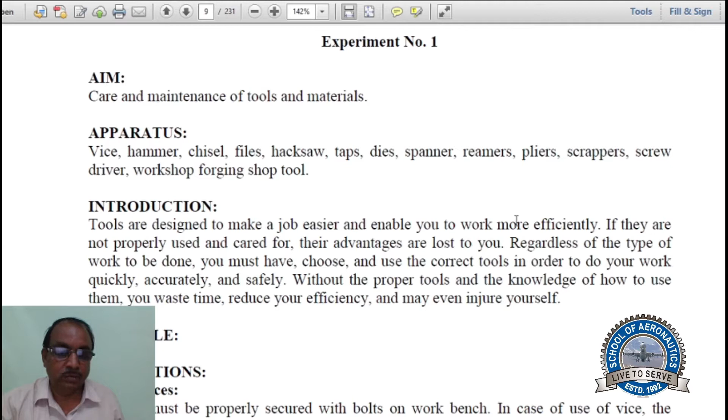Principle: precautions. Care of vices. Vice must be properly secured with bolts on workbench. In case of use of vice, the bolt must be checked and, if found loose, should be tightened with wrench or spanner. Vice should be cleaned with cotton before and after use. After 6 months of use, the main screw should be dismantled and lubricated properly.

The handle of vice should be such that while using it, it should not come out. Care should be taken that it does not bend by hammering it forcefully. Securing of workpiece between jaw and vice: workpiece must be secured in the center of vice between the jaws.

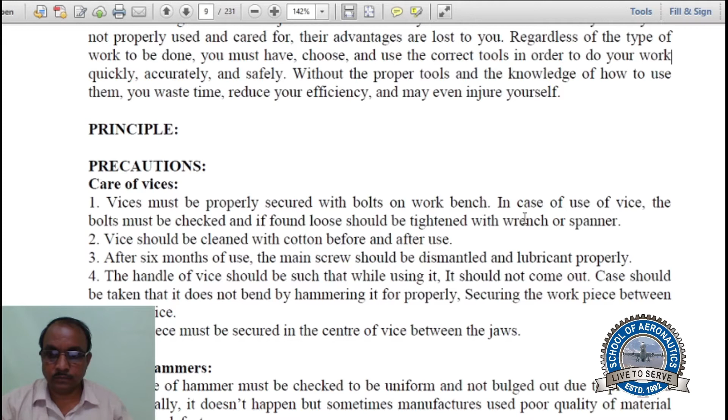Care of hammers. The face of hammer must be checked to be uniform and not bulged out due to prolonged use. Normally, it does not happen, but sometimes manufacturers use poor quality material causing this defect. The hammer should be properly cleaned and wiped out by cotton before and after use.

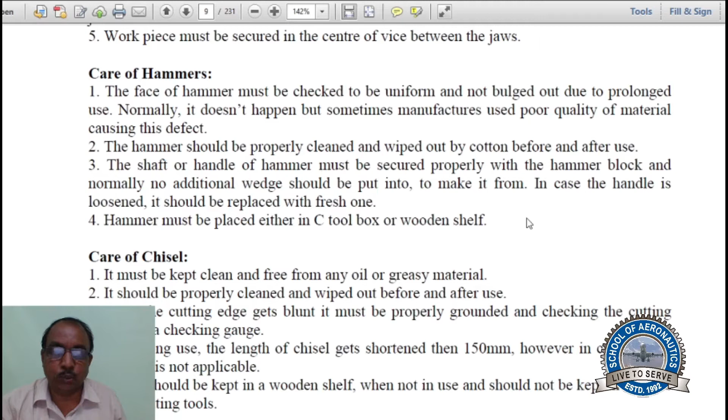The shaft or handle of hammer must be secured properly with the hammer block, and normally no additional wedge should be put into it to make it firm. In case the handle is loosened, it should be replaced with a fresh one. Hammer must be placed either in a toolbox or wooden shelf.

Care of chisel. It must be kept clean and free from any oil or greasy material. It should be properly cleaned and wiped out before and after use. Once the cutting edge gets blunt, it must be properly ground, checking the cutting edge with a checking gauge.

After long use, the length of chisel gets shorter than 150 mm. However, in case of fine chisel, this is not applicable. Chisel should be kept in a wooden shelf when not in use and should not be kept in a bundle or with cutting tools.

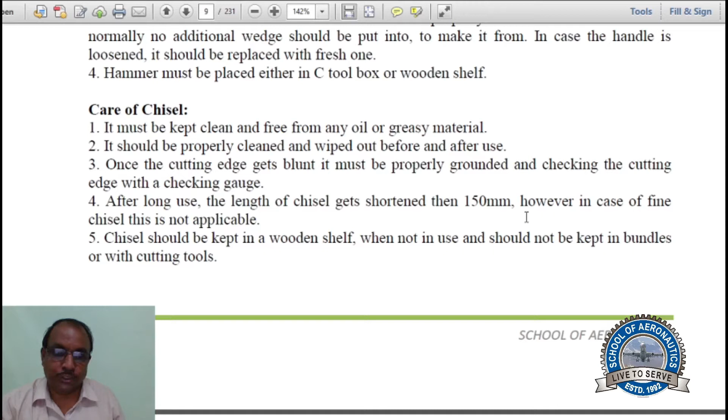Care of files. The file should not be used without handle or with a loose fitting handle. A file should never be used on hardened steel, hard surface scale, or allowed to strike against the hardened vice jaw. The new file should be used first on copper, brass, and then on wrought iron and mild steel.

Files should be cleaned with a thin hard wire brush or file card. After cleaning the file, chalk should be rubbed into the file teeth to prevent clogging of pins. The file should not be allowed to rust; to prevent it, the file is coated with machine oil.

The oil should be removed before the file is put to use by carbon tetrachloride or caustic soda. The worn out file may be reused by dipping it in hydrochloric acid. Worn out files are best suited for making scrapers, punches, chisels, etc.

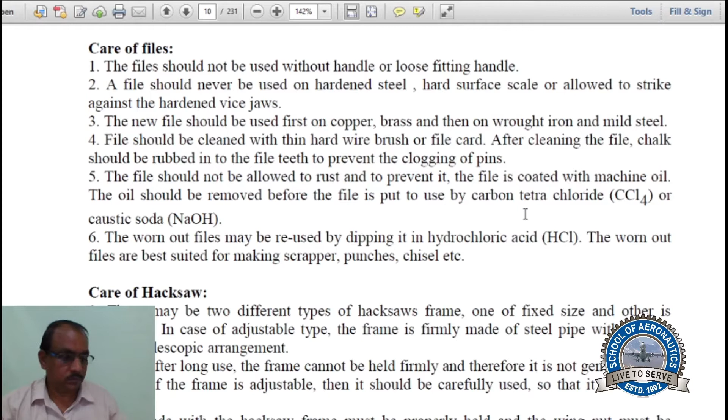Care of hacksaw. There may be two different types of hacksaw frame, one of fixed size and the other adjustable. In case of adjustable type, the frame is made of a steel pipe with locating holes of telescopic arrangement. In this, after long use, the frame cannot be held firmly and therefore it is not generally used. However, if the frame is adjustable, it should be carefully used so that it does not get loosened.

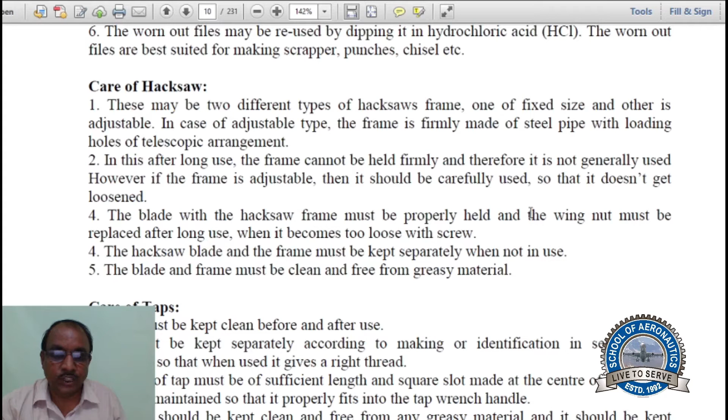The blade with the hacksaw frame must be properly held and the wing nut must be replaced after long use when it becomes too loose with the screw. The hacksaw blade and the frame must be kept separately when not in use. The blade and frame must be clean and free from greasy material.

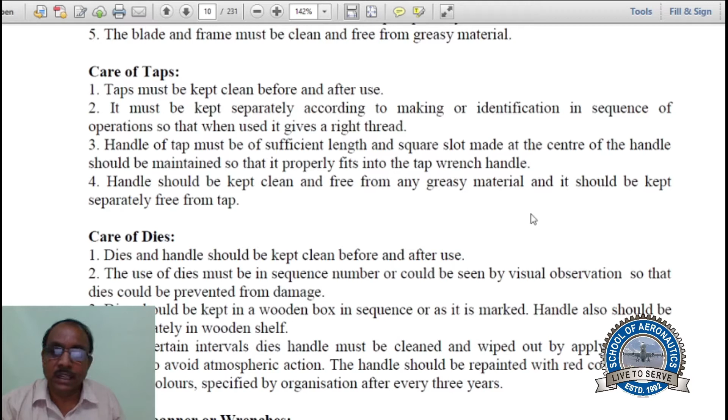Care of taps. Taps must be kept clean before and after use. They must be kept separately according to marking or identification in sequence of operation so that when used they give a right thread. Handle of tap must be of sufficient length and a square slot made at the center of the handle should be maintained so that it properly fits into the tap wrench handle. Handle should be kept clean and free from any greasy material and it should be kept separately from the tap.

Care of dies. Dies and handle should be kept clean before and after use. The use of dies must be in sequence number or could be seen by visual observation so that dies could be prevented from damage. Die should be kept in a wooden box in sequence or as it is marked. Handle also should be kept separately in wooden shelf.

After certain intervals, the handle must be cleaned and wiped by applying some lubricant to avoid atmospheric action. The handle should be repainted with red color or any specific color specified by the organization after every 3 years.

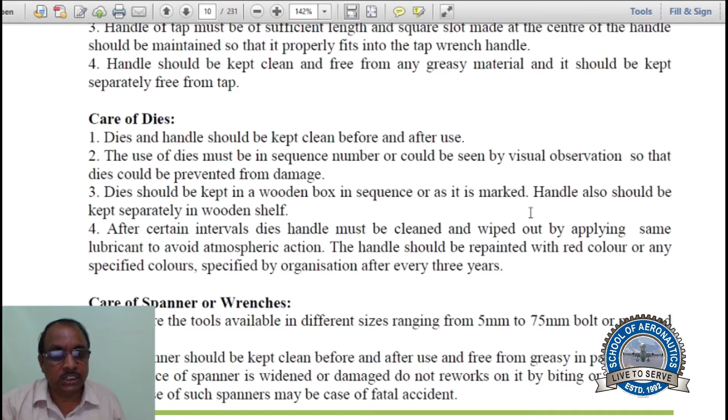Care of spanners or wrenches. These are tools available in different sizes ranging from 5 mm to 75 mm bolt or nut head size. The spanner should be kept clean before and after use and free from grease in particular. If the face of a spanner is widened or damaged, do not rework on it by beating or making it correct. Use of such a spanner may be the cause of a fatal accident.

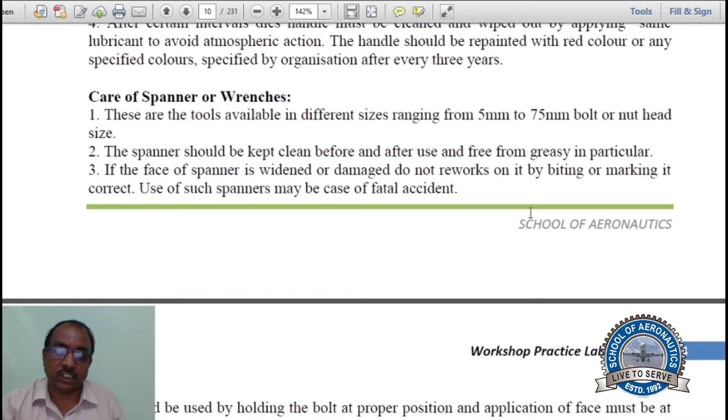It should be used by holding the bolt at proper position and application. A face must be at the extreme end of a spanner or wrench and it should be turned at right angle to the length of the bolt. Always use the right size of a spanner to avoid any damage to bolt head or screw. The spanner must be kept in a cloth jacket with flaps.

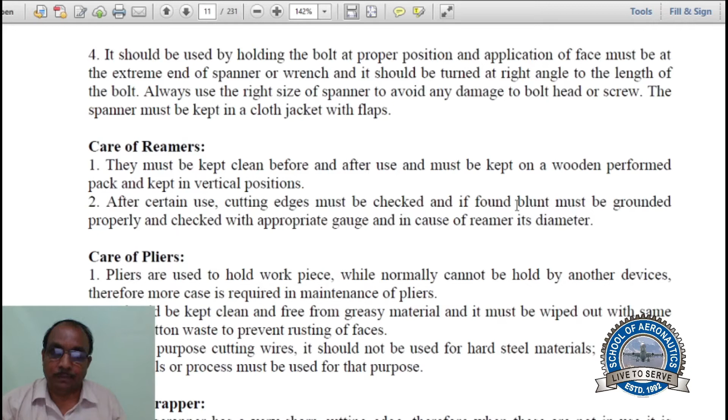Care of reamers. They must be kept clean before and after use and must be kept on a wooden performed pack and kept in vertical positions. After certain use, cutting edge must be checked and if found blunt, must be grounded properly and checked with appropriate gauge, and in case of reamer, its diameter.

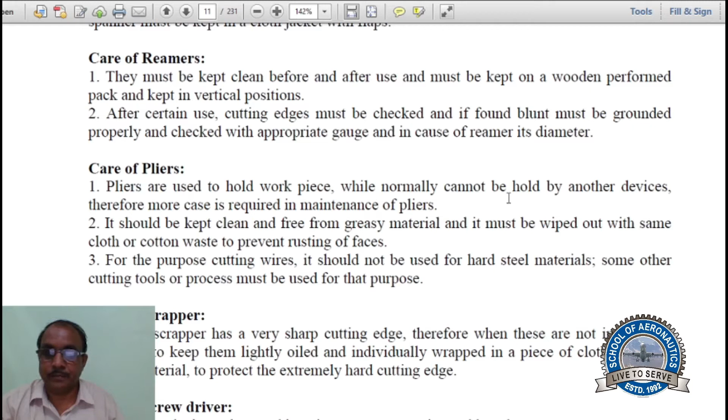Care of pliers. Pliers are used to hold workpiece while normally cannot be held by another devices. Therefore, more care is required in maintenance of pliers. It should be kept clean and free from greasy material and it must be wiped out with same cloth or cotton waste to prevent rusting of faces. For the purpose of cutting wire, it should not be used for hard steel material. Some other cutting tools or process must be used for that purpose.

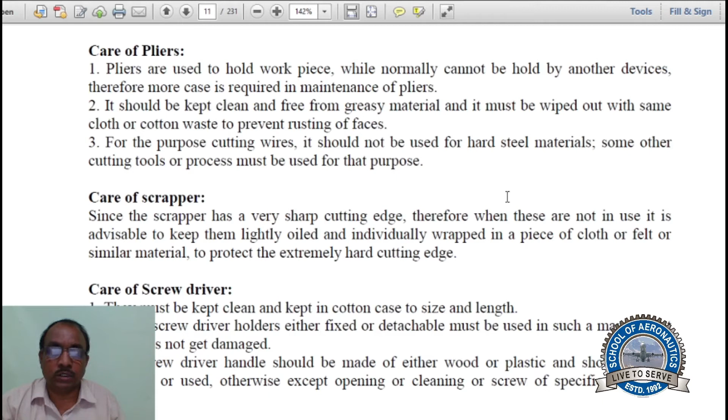Care of a scraper. Since the scraper has a very sharp cutting edge, therefore, when these are not in use, it is advisable to keep them lightly oiled and individually wrapped in a piece of cloth or felt or similar material to protect the extremely hard cutting edge.

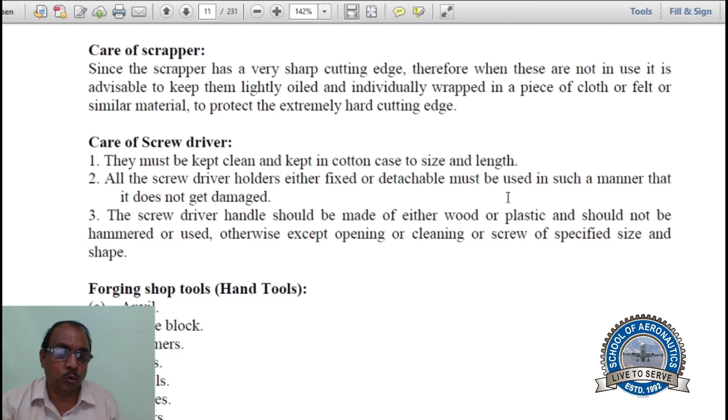Care of a screwdriver. They must be kept clean and kept in cotton case to size and length. All the screwdriver holders, either fixed or detachable, must be used in such a manner that it does not get damaged. The screwdriver handle should be made of either wood or plastic and should not be hammered or used otherwise, except opening or cleaning or a screw of a specified size and shape.

Forging shop tools, hand tools: anvil, swage block, hammers, tongs, chisels, swages, fullers, flatters, set hammers, punches, and drift.

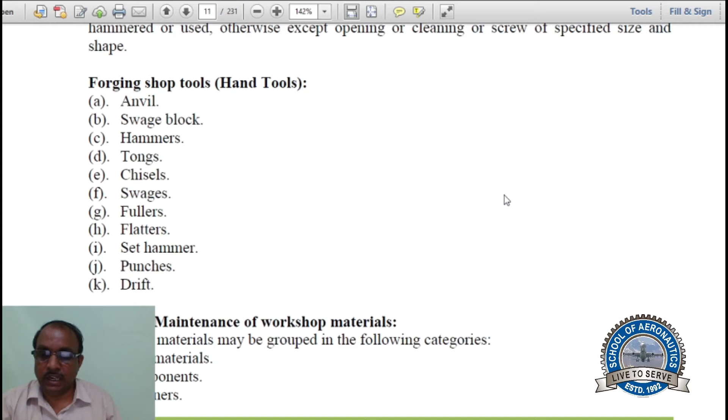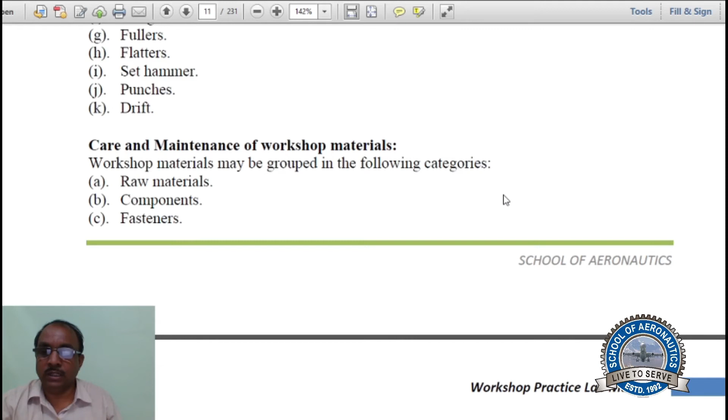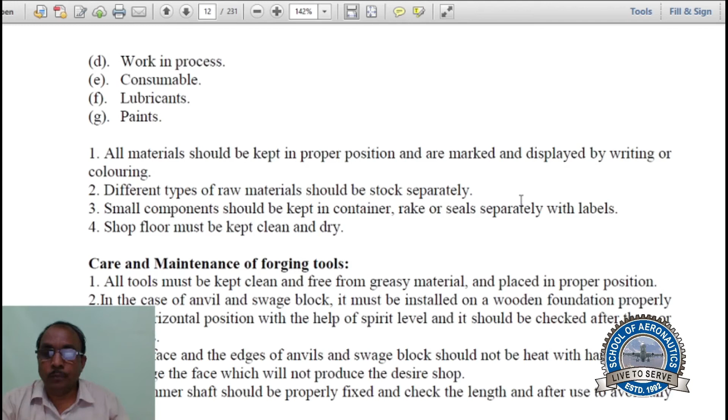Care and maintenance of workshop materials. Workshop materials may be grouped in the following categories: raw materials, components, fasteners, work in process, consumable, lubricants, paints. All materials should be kept in proper position and are marked or displayed by writing or coloring. Different types of raw materials should be stocked separately. A small component should be kept in container, rack or seals separately with labels. Shop floor must be kept clean and dry.

Care and maintenance of forging tools. All tools must be kept clean and free from greasy material and placed in proper position. In the case of anvil and swage block, it must be installed on a wooden foundation properly, set in horizontal position with help of spirit level, and it should be checked after 3 or 6 months. The surface and the edges of anvils and swage block should not be hit with hammer. This will damage the face which will not produce the desired shape.

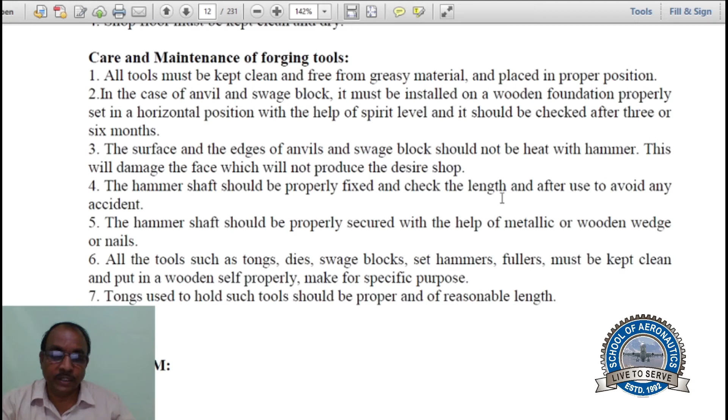The hammer shaft should be properly fixed and checked in length and after use to avoid any accident. The hammer shaft should be properly secured with the help of metallic or wooden wedge or nails. All the tools such as tongs, dies, swage block, set hammer, fullers must be kept clean and put in a wooden shelf properly, made for a specific purpose. Tongs used to hold such tools should be proper and of reasonable length.

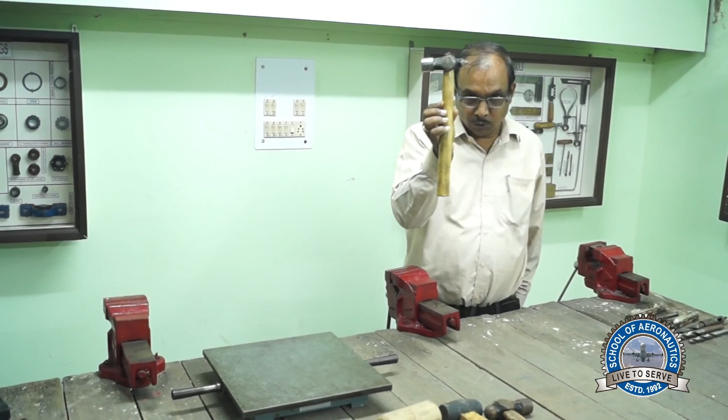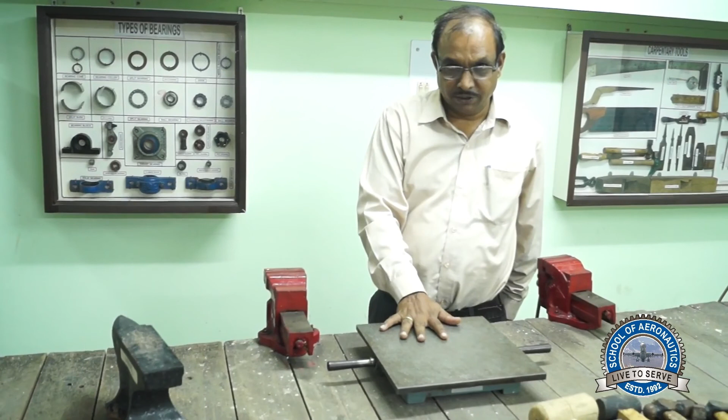This is hammer. Hammer is a striking tool. This is surface plate. It is used to check the trueness of the workpiece.

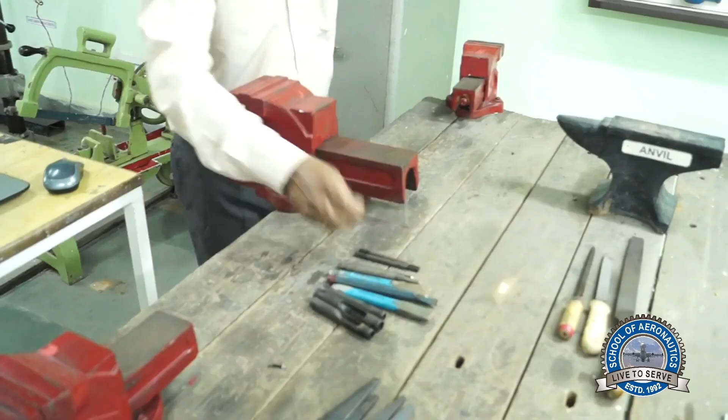This is anvil. Anvils are used to support the workpiece when you are going to do stretching work, bending work, and also used in the forging workshop. This is center punch. It is used before drilling to locate the accurate point for the drilling operation.